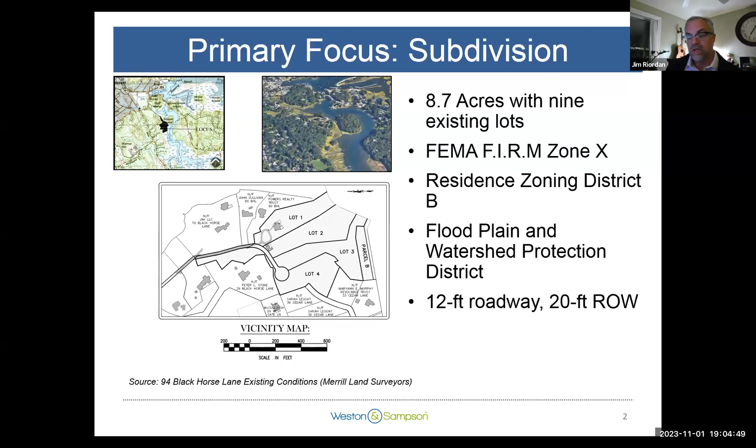And some of those things are depicted in the graphics to the left on this screen. This is taken from Merrill Land Surveyors, and it depicts the proposed project. As you can see, there's an extension of an existing private way.

The applicant intends to widen the private way to 18 feet. And there will be creation of 4 lots from the 9 existing. So they're going to collapse some of the lots and create 4 total.

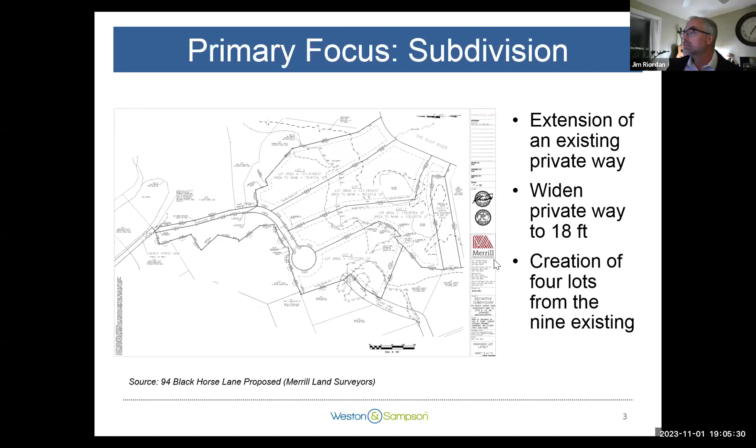Our review standards included the Cohasset bylaws, Cohasset subdivision regulations, general constructability comments, so essentially good practice. And we did an initial peer review, presented that to the Cohasset Planning Board back in September.

I won't go through all these items, but they are as listed in the peer review letters that were sent your way. They do include materials that we have received between August and the end of October, October 26th. We did an initial peer review, as I mentioned, back in August, and that was delivered August 30th. And we've done 3 supplemental peer reviews since then. So there was one done on October 6th, and then 2 others.

So the two others you have in front of you, we received recently, October 25th, and then we received some more information from the applicant on the 26th of October. We were able to fit in an expedited peer review of those items, delivered on the 27th of October. The materials we're talking about this evening are primarily the ones at the bottom of the screen in blue font, so they stand out from the ones we reviewed previously.

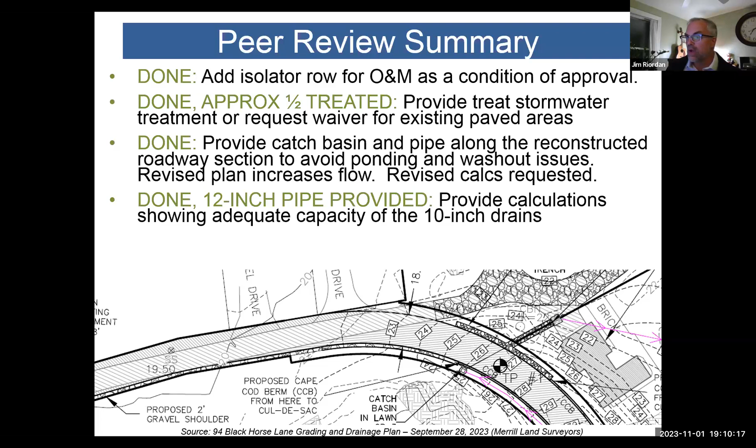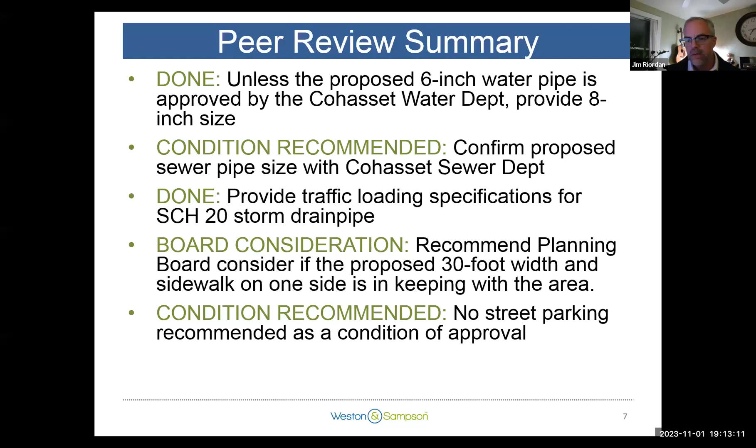The final item here is recommended for a condition: that there is no street parking, recommended as a condition of approval. The way it's set up currently, street parking would be temporarily restricted, and we would recommend as a condition of approval that it should be permanent. That concludes the main comments we have for the peer review. Happy to take any questions or comments at this point, and I'll remain on for items that might come up as part of discussion.

Thank you, Jim. Anybody on the board have a question for Jim?

And Kevin, go ahead. Jim, on the board it said Cape Cod berm. Can you briefly describe what a Cape Cod berm is?

Sure. So normally on a roadway, the traditional thing separating a sidewalk from the road is curbing, like granite curbing. But sometimes on a roadway you'll notice there's an asphalt hump to both sides of the road. That's intended to direct stormwater so it stays within the road. It also helps keep cars aware of where the edge of the road is. Those humps are called Cape Cod berms.

I guess they were first used on Cape Cod, which is where the terminology comes from. So it's something less than traditional curbing, without angular edges — a more sloped surface of a smaller scale than a regular granite curb. That's correct, yep. Okay, I have seen those and I'm familiar with them. Thank you.

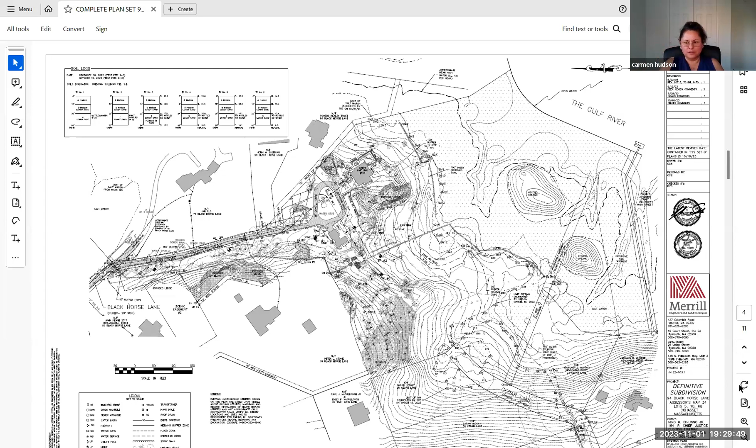Also, I just wanted to mention the Cape Cod berms. Originally we were proposing, along the new road—that would be the extension of the existing private way here—just regular bituminous concrete curb, so that those go up vertically 6 inches. Now we're proposing Cape Cod berms, so they're 1 foot in width, and they only go up in the back by 3 inches. The reason we did that is so if there's any need to go over the curb, a car could easily go over the Cape Cod berm—for an emergency vehicle or simply a truck going by, a car can easily go over the curb and just park on the lawn. So it's 18 feet of pavement and 2 feet, 1 foot on either side, of mountable shallow curbing.

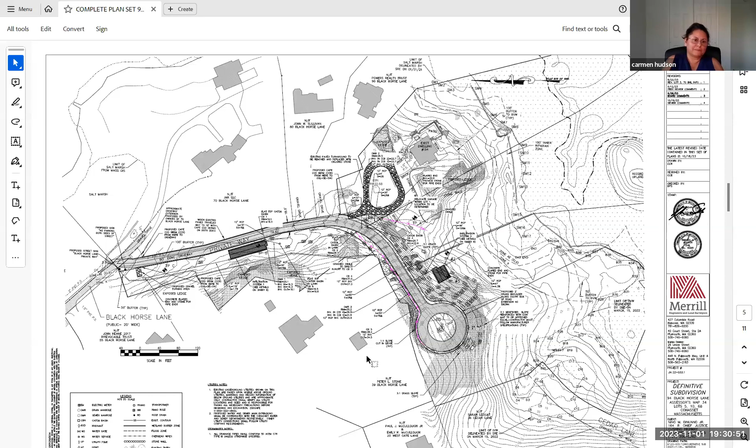Now, wasn't there—I just can't get a straight answer to a simple question. You're using impacts on the environment as a justification, and I still haven't seen what the impacts are.

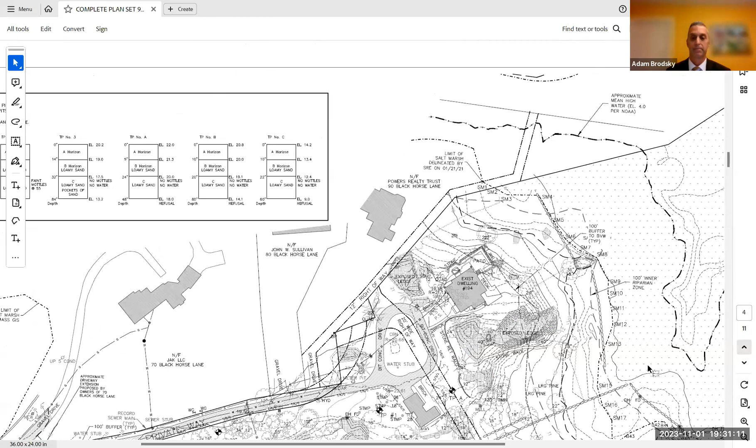So these are all of the trees that we have all along where we're proposing the road, and these are only the trees that are 12 inches and over. Any trees below that are not required to be surveyed. This area is all going up in elevation and consists of ledge, so we are trying to reduce the footprint of the road to remove as few trees as possible and blast as little ledge as possible.

There is a salt marsh on this side. These are isolated vegetated wetlands, and there is a bordering vegetated wetland here. So we are surrounded by wetlands, but we managed to put the road and all of the work outside of the wetlands, the floodplain, and the buffer zones on this side, to minimize the environmental impact.

Can I ask another question about the area that's treed? Do you have an inventory of the type of tree that you're discussing as something we might wish to preserve? We have a series of invasive trees that are very common in that setting, and I'm wondering if these are specimen trees or basically maple trees, which are considered primarily invasives and not specimen trees.

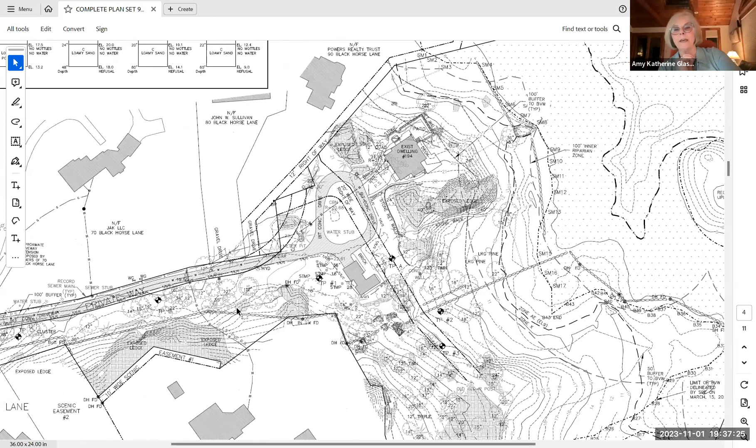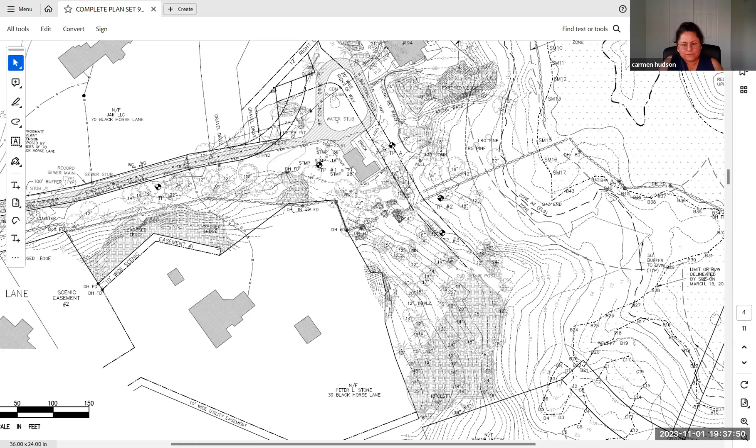Along the road, at the very beginning, these trees would remain - anything that is upland from grading. So all trees in this location, and this is the buffer zone. There are many trees beyond the buffer zone; however, we're not showing that since we are not doing any work within the buffer zone, but we did locate them. So any trees beyond the buffer zone are being saved. Once again, anything beyond the grading will not be touched.

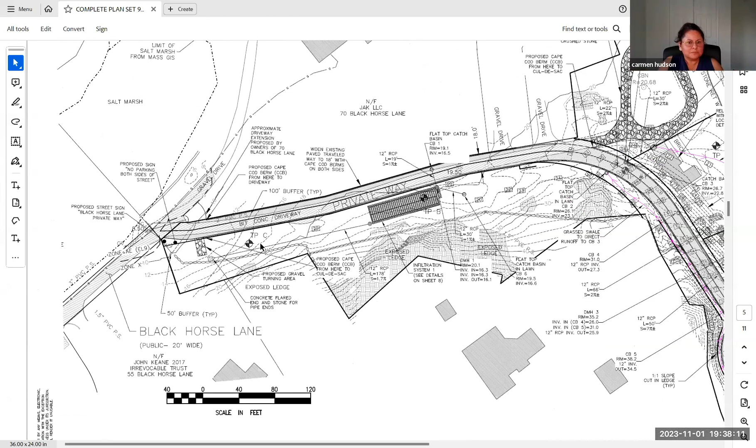I see, okay. So then let's go back to the beginning, to the road.

So if we wanted to have a regular 1970s subdivision road with a sidewalk along the road we are talking about, and where the infiltration chamber is going to be located, and it's going to disturb the ground, is there an environmental impact that we are missing or that we're going to lose? Because it sounds like you're actually going to have to tear up that area anyway. So then if we wanted the road to be bigger and have a sidewalk, would we be actually making things worse?

So this portion of the private way is not part of the subdivision. The subdivision starts here at the new road - that is the extension that we're proposing, with 6 feet of additional pavement. Ms. Hudson, we are considering the entire length of this private way from where it ends at the public portion as part of this project.

You're proposing widening it, but less than we require. We've asked questions and we're not getting answers. You're saying there's a justification of environmental impact - in the area along the side of this road there's going to be an environmental impact because you're putting in an infiltration system, which has got nothing to do with the roadway. So a simple question: why can't the roadway be wider? What are we losing if it's wider? You're going to lose more trees, you're going to have more ledge removal and more alteration than you would without it, with no justification for public safety.

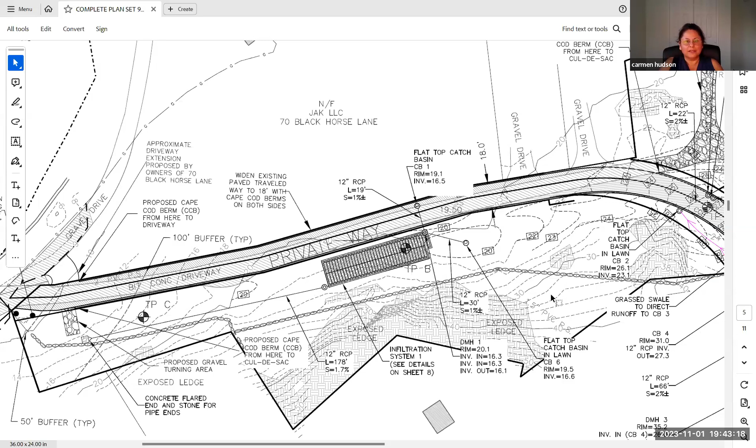As you can see, it's close to the road, and that's because of all the ledge here. All of this is ledge, so we're trying to stay away from it, and these are shallow-to-bedrock soils. So in reality, we don't know if there's going to be any ledge in any other area that we didn't encounter.

Once again, any more pavement or impervious sidewalk, any impervious materials would require more infiltration. So it's not simply why can't the footprint of this be 2 feet wider? It's going to impact everything else we need in order to handle that extra 2 feet, let's say 1 sidewalk or 2 sidewalks or anything impervious.

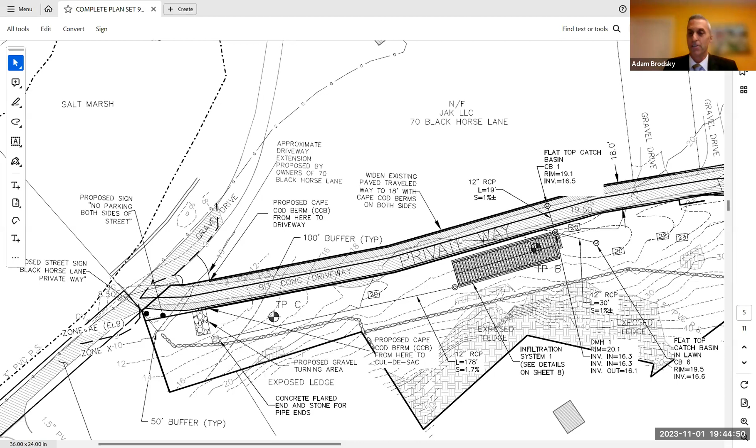Anybody want to comment on that? Chair Callahan, we have no issue with prohibiting parking along the private portion of Black Horse Lane. I suggest it's infeasible to park on the public portion of Black Horse Lane, and that no one would really do that and walk some distance. There's plenty of space on these properties for parking.

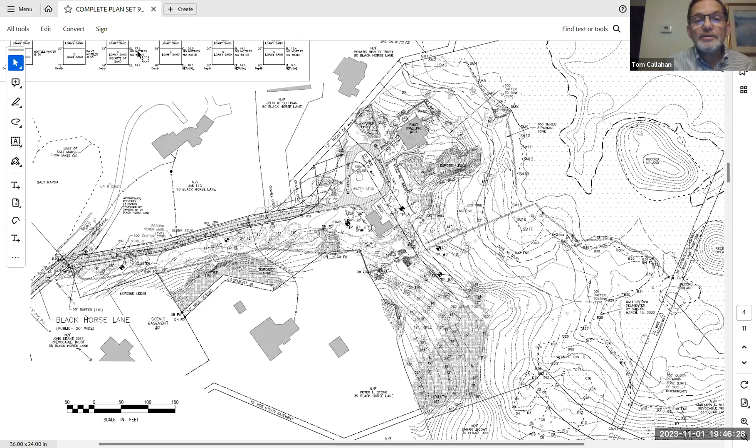So I'm trying to understand this. One of the lots is going to own the land between 39 and the subdivision road. Correct, yeah. So I don't see how that could happen, because that lot would then be reduced. I mean, you're asking us to encumber property that's going to be conveyed to other people, because I don't even see how this is even feasible.

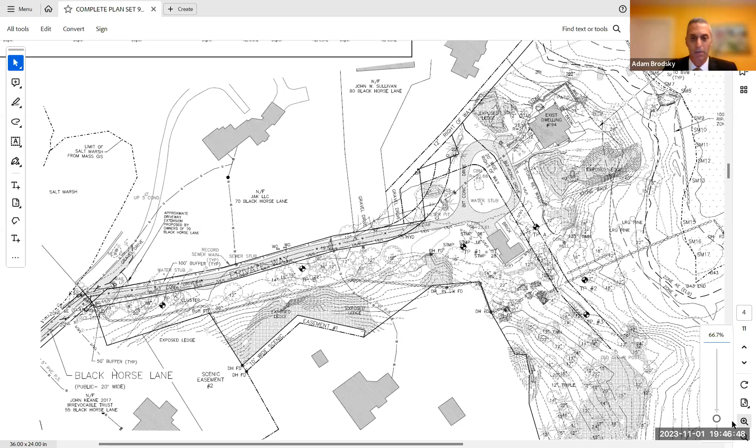Well, it's feasible because your new lots are going to have enough size that they could convey a small strip of land to this owner at 39, and then all of a sudden 39 has frontage on this new roadway. You need to go to the proposed plan, not the existing conditions plan.

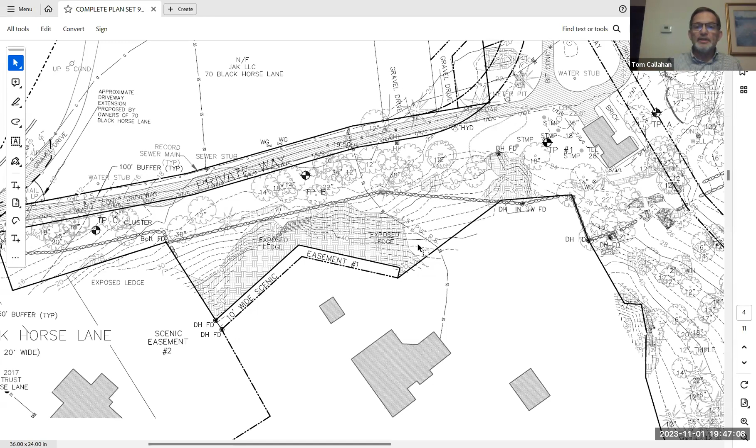Okay, so I just wanted — I mean, I appreciate the fact that there's this small useless strip of land to whatever lot will own it, and then all of a sudden 39 has frontage on this portion of Black Horse Lane. 39 is large enough that somebody could try to Form A it in the future, and then there we are with more lots being served. I'm throwing that out there on the same principle as not connecting to Cedar Lane — to not encourage more development in this area than would already be permitted.

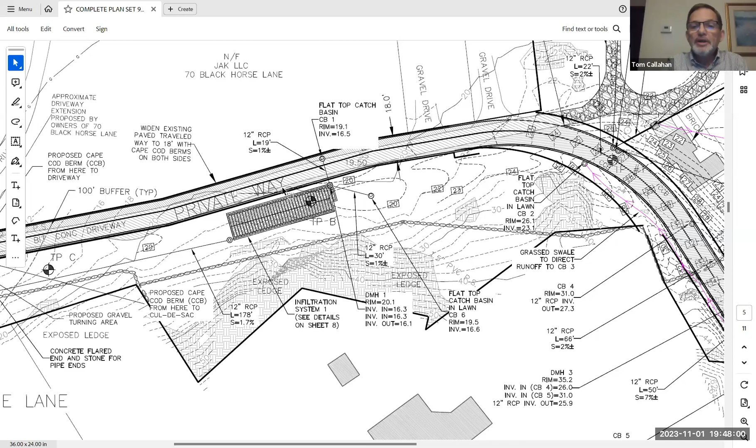This lot, however, is about 40 feet higher than the elevation of this road. I'm talking about over here towards the end of your cul-de-sac. I have no idea what the elevations are at that point. They go from 40 to 64. Okay. Not impossible.

It would be very feasible or conceivable that the owners of these new lots have these useless strips on the other side of the roadway, and the owner of 39 would become interested in that, to have another point of access, possibly to develop a future lot. That's all again, it just occurred to me sitting here for the last few minutes.

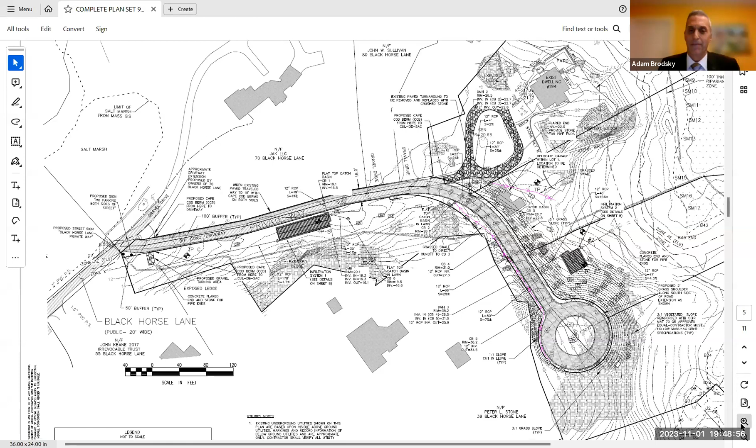And would you, how would you react to a condition that wouldn't let that happen? I've never seen a condition in a subdivision approval that restricts future development of an abutting lot. I understand that, Adam. I think I'm thinking outside the box. I tend to do that, trying to understand it, Chair Callahan. I think it's overreaching by the planning board in connection with a subdivision road.

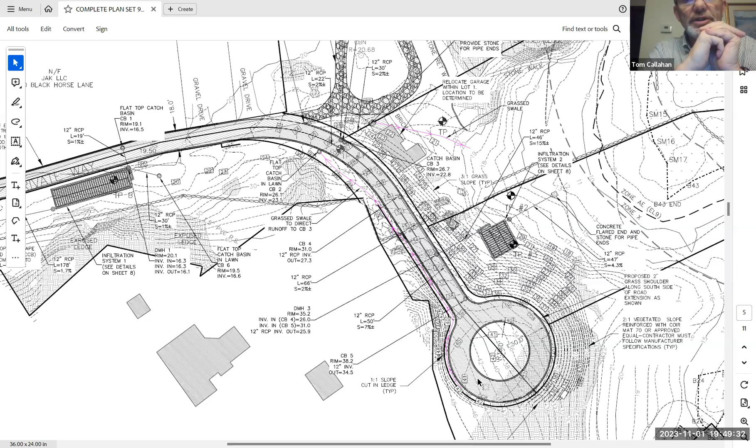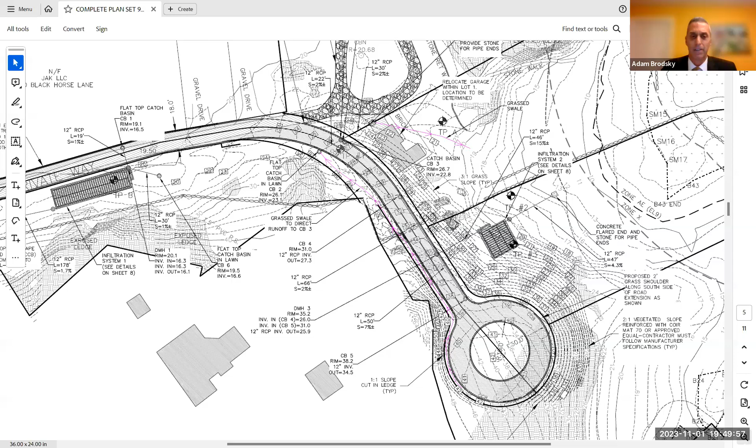I understand the planning board does not want to allow development in the town, but- No, that's not a fair statement. I'm just thinking outside the box here because of the close proximity and this essentially useless strip of land being created between 39 and the roadway. That's all I'm saying. The planning board's mission is to determine whether what we're proposing either meets your subdivision standards or is entitled to waivers under your subdivision standards, without regard to property restrictions. The client has already agreed not to connect to Cedar Lane, principally because it's not feasible due to the existence of wetlands. But to further place restrictions on property that affect others, I think is just, again, a business decision for Mr. Dinuno, but I would not recommend it.

I have my answer, so. Anybody else on the board have anything to say?

Yeah, just a quick follow-up, Tom, on the impact of the road width. If I remember correctly, the American Highway traffic engineers indicate that the traffic counts for a house is one peak hour trip. So if you have four houses in a subdivision, you'd expect four peak hour trips. Presumably that's what the traffic study says. So not a lot of traffic.

Yeah, no, I mean, if it was Fair Oaks with 45 houses or so, that's sort of a different animal.

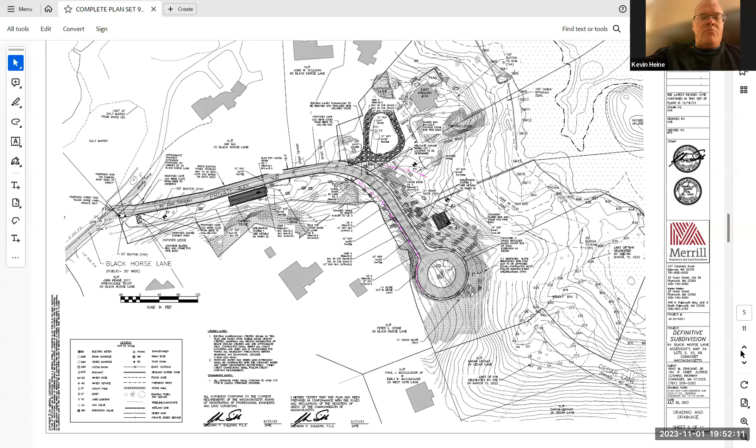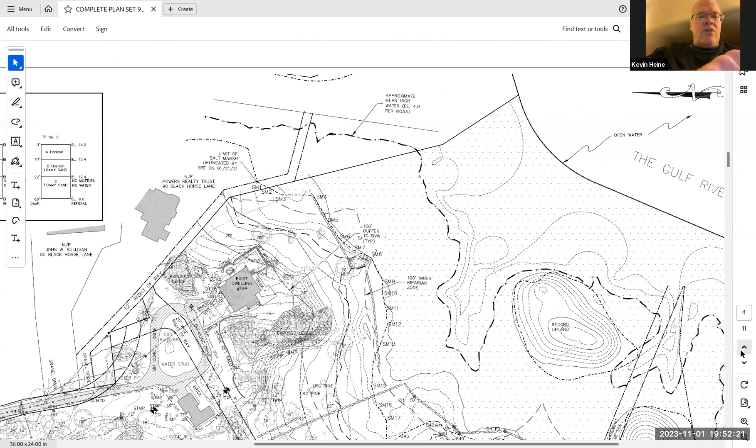Sorry about that. Attorney Brodsky, could you clarify which parcel would own that thin strip? You were just in a tangential discussion with Chair Callahan about this, is that a thin strip owned by one of the four lots, or is it owned by a separate parcel or lot that isn't developed? Can you just clarify what we're talking about? And I guess that goes for that whole strip along, I guess, the southwest side of that private way we're talking about.

Yes, sir, I believe that all belongs to lot number 4. Okay, but lot number 4 in itself has the necessary dimensions, buildable area. In itself, that strip just happens to be attached, and correct me if I'm wrong, that strip we're talking about, that thin narrow strip that goes from the round cul-de-sac and winds its way around the bend and then goes all the way up to the public portion of Black Horse Lane, that's not

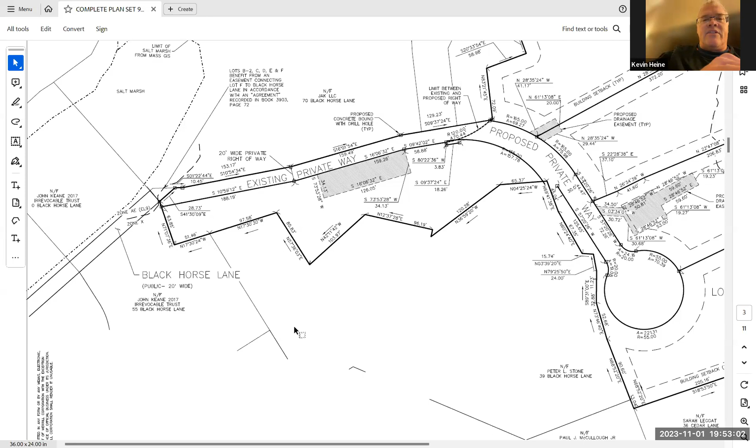necessarily needs to be attached to the lot it's attached to. Is that right? I'll have to defer to Ms. Hudson on that question. I believe our intention was to limit the number of lots that could be developed, so the rest of that land was included within lot number 4. Yes, and I'm sorry, could you please repeat the question?

Yeah, see where you have your pointer right now, that area, and you can go all the way further down past beyond that, that little strip there. But yes, exactly, you're following it up, going up around there. That portion of the lot and the acreage in it is not in itself required to be attached to the lot you have it attached to, which I believe is the lot referred to as number 4.

Yes. Okay, so conceptually, could that portion be considered not a fifth lot for development purposes, but a fifth lot, say, for other perhaps uses, by just saving trees along it, minimizing impacts to ledge, protecting existing ledge, perhaps just preserving that portion of this area we're talking about, if that were to be carved out as a separate lot, not for development purposes, but just to remain as a preserved area of no further disruption, no further building.

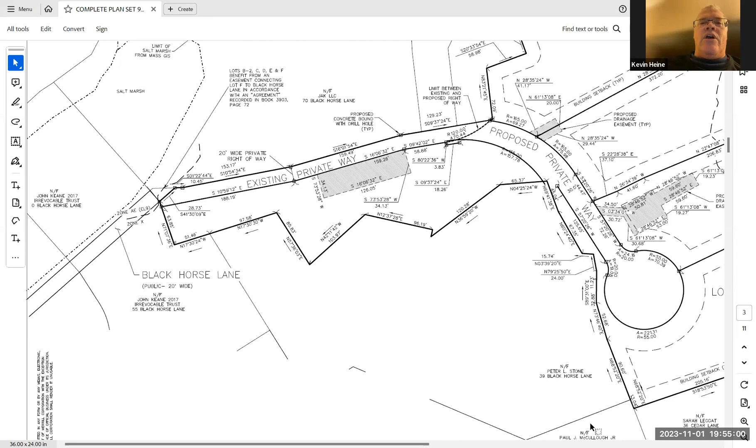That, along those lines, I'm conceptually putting that out there. Just wondering if that was any consideration the applicant had, or if there's anything the board should know with regard to that. Mr. Heine responds that it is their intention that this area is not going to be developed into another single family lot.

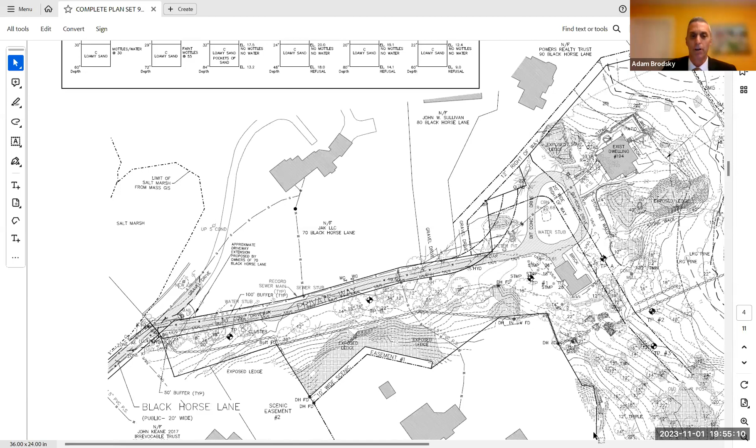We're putting our stormwater structures there. There's some significant elevation. The only usable land is now going to be used for the additional stormwater BMPs that we were asked to provide for the existing portion of the road. So there's no plan for development of that.

So along those lines, conceptually, is it possible, to ensure that remains that way in perpetuity, that there could be a property line separating that parcel out from the developable property connected to it near the cul-de-sac? This area could become its own lot, perhaps transferred by the applicant to a third party or trust, with the intended purpose of preserving it as is, never to be developed.

The problem is we're also going to be responsible for maintenance of those stormwater structures. I don't see how you could accomplish both of those tasks, because it's going to be the responsibility of the lot owners to maintain those areas. If we transfer it to a third party, it's pretty complicated.

I've seen and heard a lot more complications than something like that, where a separate party maintains some engineering structure that benefits other lots, on a portion that is preserved and remains preserved in perpetuity, but still has some engineering features used for other areas. I think you understand the concept, but I'm putting it out on the table for others to consider.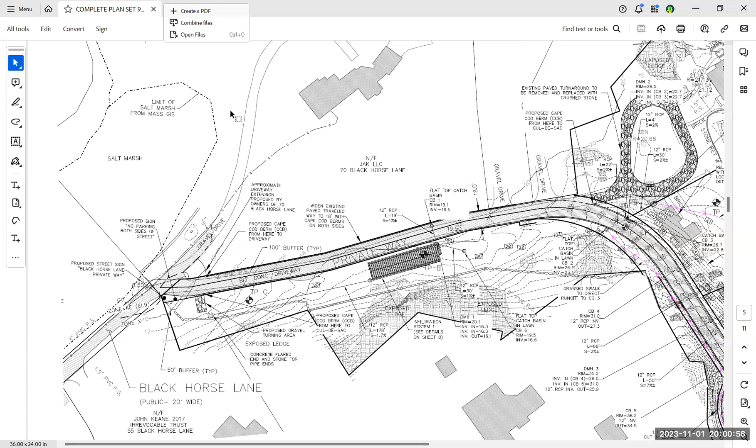Could you describe who that person might be? He is a site contractor who does a lot of the town's work as well as all of my work.

Chair Callahan, I'm just trying to think out loud how we verify that number or feel comfortable with it. Jim Reardon, is that in your firm's expertise, or is that something our DPW and building inspector in combination would have? I just want to make sure it's the right number. Not questioning Mr. Iaria's experience, but we have to protect ourselves too.

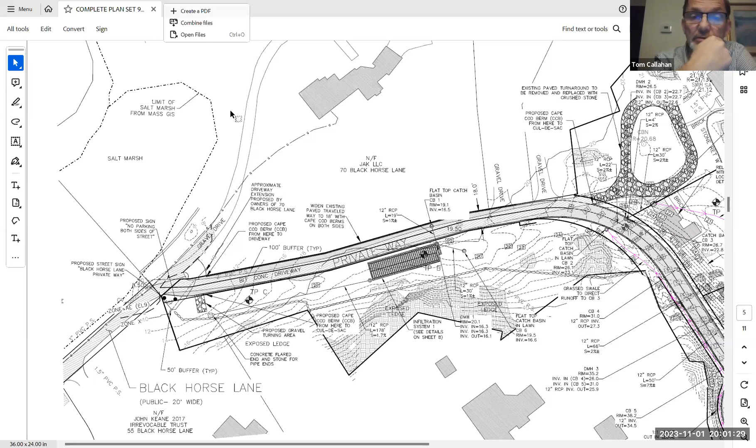The other thing is the condition about potential future damage to the culvert. Mr. DeNuno consulted with the DPW because one of the neighbors expressed concern about its condition. The report back was that there's nothing wrong with the culvert - it was apparently redone, and our DPW's Mr. Joyce said he thinks it was right before COVID, so he's estimating 2019. It's fine now, but the question is in the future.

It's a critical piece of infrastructure, and the condition was written such that it would have to be demonstrated that it's additional traffic loads or construction vehicles from this project causing the damage. Obviously it could fail on its own from age, and that's the modification I proposed - that the applicant would have liability for any damage it caused to the culvert. But if the damage was caused by others, it's not the applicant's responsibility. As drafted, the applicant was something of a guarantor of the condition of the culvert. So that was one of our suggestions.

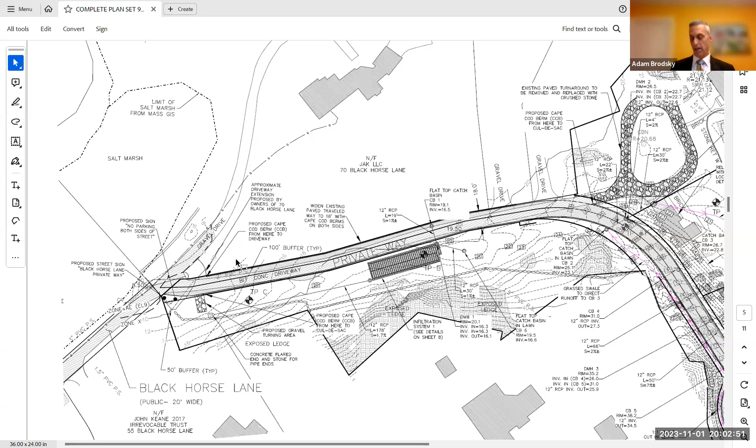And then I just want to remind the board that in lieu of a homeowners association, we proposed actual cross easements for all of the lots whereby the lot owners would be responsible for maintenance of the subdivision road as well as the stormwater BMPs.

Could you explain why you're making that recommendation? You're basically creating a situation in which no one would necessarily have any interest in putting money away to maintain the infrastructure they're responsible for. A homeowners association is designed to ensure, if they can, that there are resources so that if something needs to be managed or fixed, there's resources for it.

And Massachusetts law is pretty clear - homeowners associations are often used for larger developments where you have so many property owners it makes sense to have all of the additional bureaucracy. This is only 3 additional lots plus Mr. DeNuno's home, so the more cost-effective way is legally obligating the property owners to maintain those structures. It's only a handful of property owners, each responsible, and they will work out how to do it in the future.